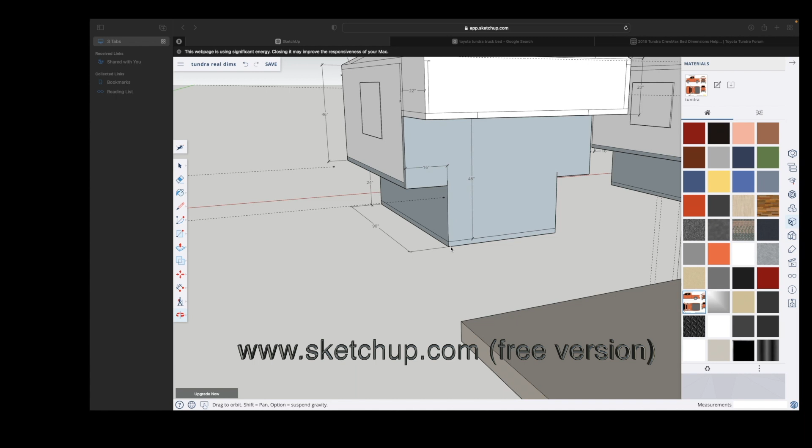So the dimensions I chose for the truck camper is going to be 48 inches across the bottom. So this will fit perfectly between the wheel wells, which is a little over 49 inches. The sides of the tub extend up 24 inches, which is just a little higher than the side rails of the truck, or the side walls, I should say, of the truck bed. And then the wings come out about 16 inches on either side of it.

So, though you may think that the wings actually sit on the sides of the truck bed, they do not. There's actually some space there, and I've allowed for, I believe it's 2 or 3 inches between the top of the side walls of the truck bed and the actual wings here. So the bottom piece here will fit right in the middle between the wheel wells, rise up above the sides of the truck bed, and then the wings will come out 16 inches on either side.

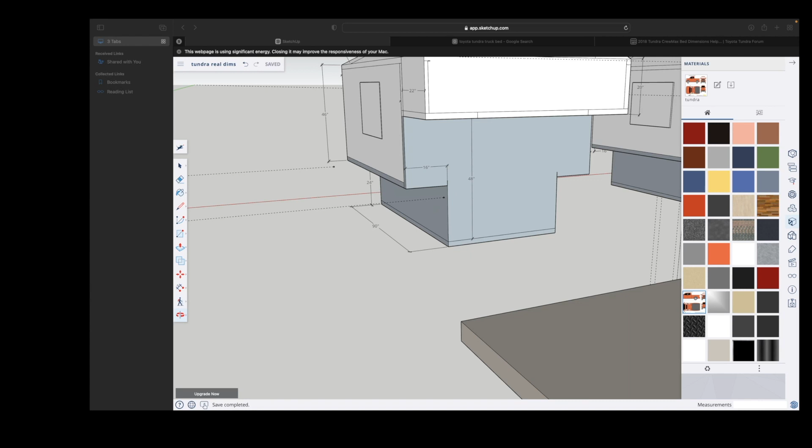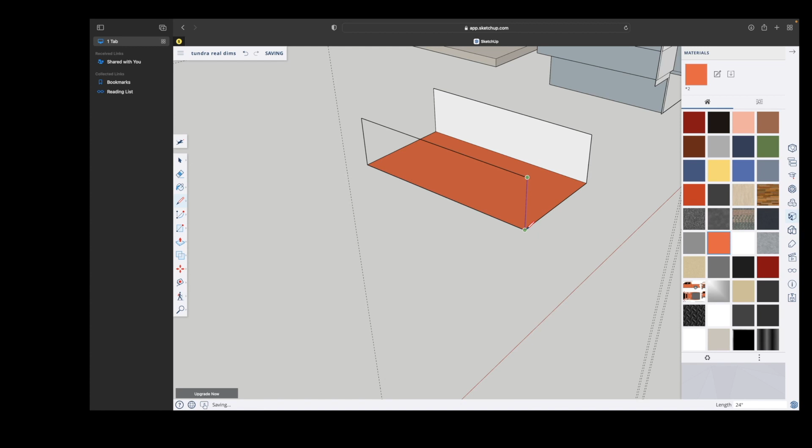Now the main structure of the truck camper is almost entirely built out of 2-inch Kingspan insulation foam, which you can get at Lowe's. There is a Foamular version, which is the Pink Panther version of the 2-inch, but it was extremely hard to find, and the compressive strength wasn't quite as much as what it was for the 2-inch Kingspan. So 2-inch Kingspan, 25 psi is the compressive strength on it, and it's got an R10 value.

Comes in sheets of 4x8, which actually worked out rather well. There wasn't a whole lot of trimming that had to be done because obviously the width of it is 48 inches for the piece that goes into the bottom of the bed of the truck, and then each of the side pieces go up 24 inches. So even though I did have to make smaller cuts to get the two 24s, the excess that was cut off was used to do the wings on the side of the tub.

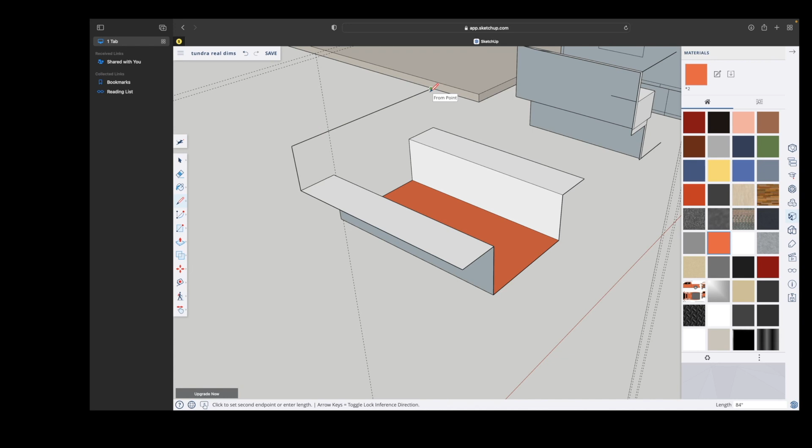And then, of course, had to use another sheet in order to do the complete backing, or the backboard. I guess you would actually call it a bulkhead, which would then go up against the back of the truck window, or that's where it would sit. It doesn't actually touch, but it's literally just a bulkhead, and it also extends up 48 inches.

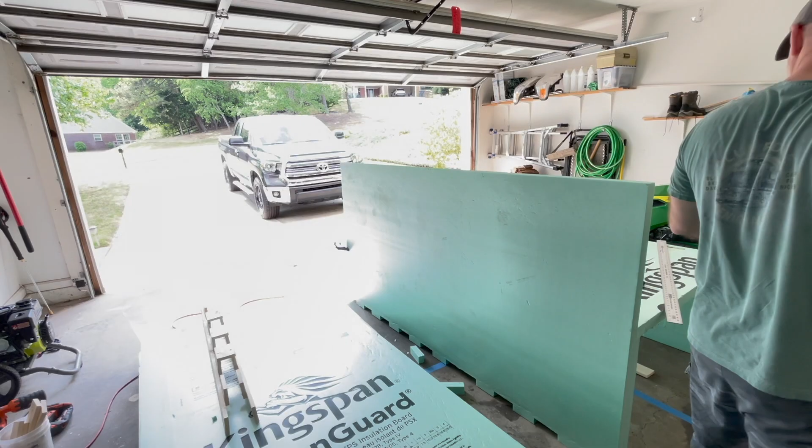So I completely stole an idea from a guy on YouTube who also built one of these, and actually it made a whole lot of sense. Rather than epoxying or gluing the boards together edge on edge, where you basically only have one point of contact on the edge, what he had done was almost like a tongue and groove or a notch method, and I basically just duplicated that by building a jig out of 1x4s, just screwing them together and putting, I believe it was 3 inches between each spacing, and then used a hot wire in order to cut out the notches, spacing every other one.

And then after I reversed it, did the exact same thing, and then on the corresponding pieces I just offset it by 1 so that they would all interlock. So basically on that method you have 3 points of contact that you can epoxy to the other board or glue it with the other board.

In my particular case, I used a 2-part epoxy for the majority of the gluing to bond the two surfaces together, and in some cases I also used some industrial strength Gorilla Glue. Once they were cut out, I simply went back when everything was said and done, used an orbital sander, and just cleaned up the edges and made sure they were good and flat so there was a nice tight fit.

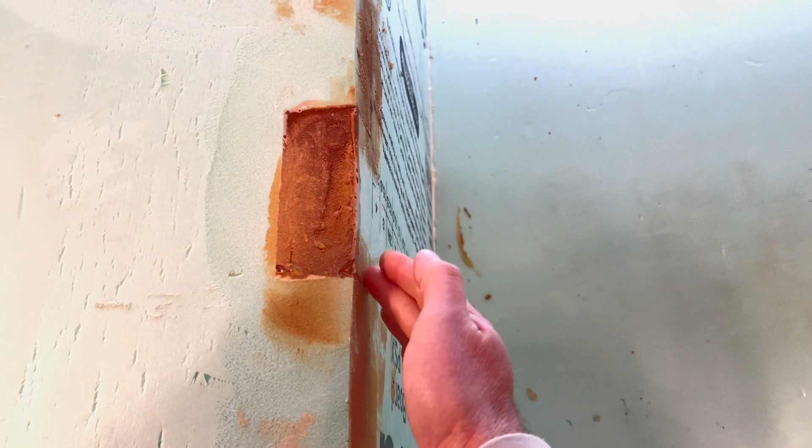So you have where I'm at right here, side, back side. Of course, there's obviously nothing on the front, but then the process is repeated on the bottom, sides, and the sides. So just to add a little bit extra, hopefully more surface for it to actually contact.

Now, something to keep in mind when you're working with foam, whether you're doing a foamy camper or foamy trailer or foamy truck camper, doesn't matter. This isn't precision engineered material, okay? And the only way to keep it somewhat square was basically doing most of it by measurement.

So when I'm gluing these sides up from the bottom there to the top, and then with the wings out, it was using boards with clamps in order to basically measure it from one side to the other, and then try to duplicate it on the other side to get it as close to square and level as I possibly can.

So yeah, it's not easy because you're not going to make perfect 90-degree angles, but certainly you can try to do your best. And all things considered, it's actually fairly well squared if you look at measurements. So yeah, just something to keep in mind.

Now, once all the seams were epoxied together, I used a little bit of epoxy along with some wood flour mixed into it, which is why you see it as a brown color once it dries up. And I basically used that to fill up any voids or gaps between where they were glued together initially, because no matter how hard I tried, there were still a few gaps here and there.

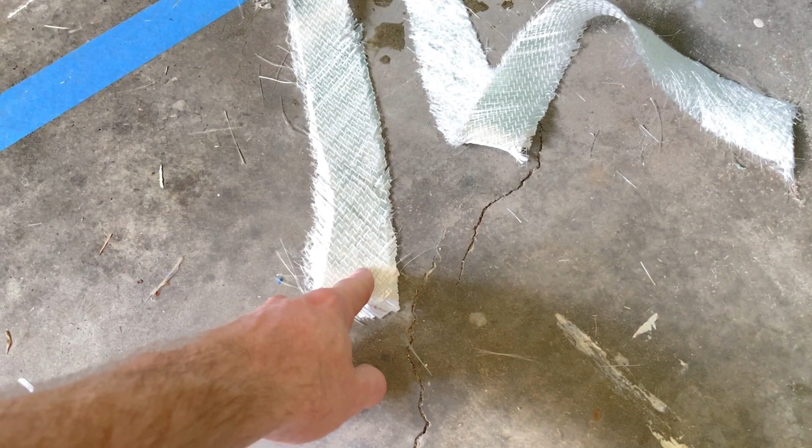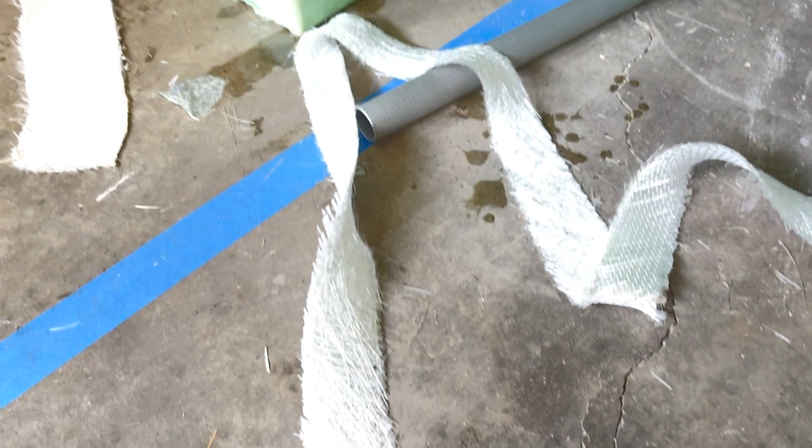All right, anyway, so what am I using? So again, the fiberglass is 1708. For those of you who don't know what that is, basically the weave on the front is, I think it's 17 ounce, and then on the back side is stranded fiberglass fibers randomly placed. And so I believe that's 8 ounces. So 17 would be the ounce of cloth on the top, and then the 08 would be the ounces of fibers on the bottom. I believe that's it. If I'm wrong, I'll post something. It's kind of hard to remember.

What I am using is West Systems epoxy. I started using Total Boat, which is fine, but I found a couple of issues with it as far as just the viscosity, or how it hardened up, and it's definitely got a different smell than what West Systems epoxy does. I don't know if that's in the refining or what, but kind of give you an idea. So I'm using West Systems epoxy 105 in a gallon, and then I'm using the 205 fast hardener.

I originally was using the slow hardener on the wings. I ran out, had to buy more. They were out of the slow hardener, so I wound up using the fast hardener. Now the problem with that is you don't have a lot of working time before it sets up on you. And then you're kind of SOL if you do, and that's the problem that we had.

We had here, the white that you see is actually fibers that were not penetrated completely by the epoxy. So what wound up happening was this started to dry very quickly and turned hard, and then the top of it would not get any underneath, and I was using the bubble popper and everything, and I still couldn't get it. But for the rest of it, a couple of little white spots, very, very little. There's a few here and there, and that's a piece of fiber.